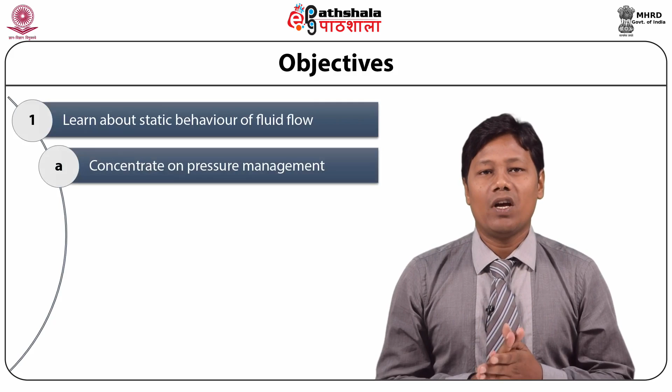Seeing the importance of fluid flow in this subject, we are going to discuss fluid flow and their behaviors in this module. We will learn about the static behavior of fluid flow, mainly concentrating on pressure measurement and how to calculate pressure using different manometers. We will discuss that first, and also do some numericals on that.

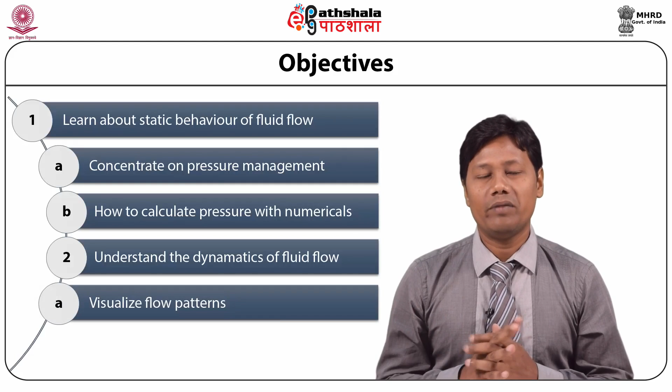Then we will go to the kinematics of fluid flow, where we will visualize the flow patterns and flow types. We will discuss the different flow types so that you can utilize them in our different calculations.

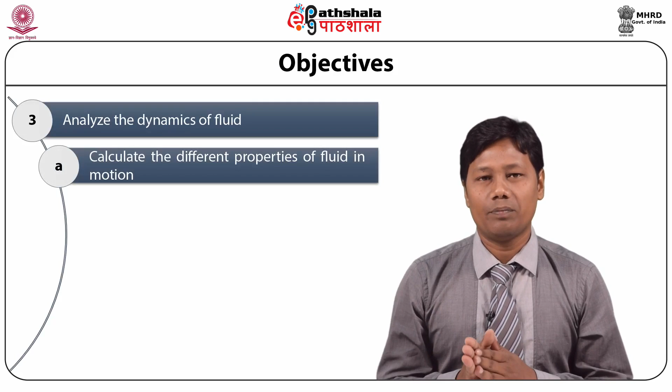Then we will move forward to the dynamics of the fluid. Dynamics of the fluid means when the fluid is in motion, so we will calculate different properties of the fluid in motion. There we will concentrate on the pressure drop in pipe flow, and also discuss different frictional losses in the pipe.

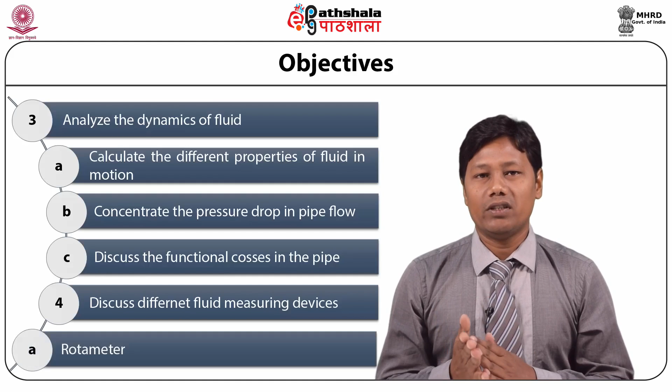Also, we will discuss different fluid measuring devices like rotameter, venturimeter and orifice meters, and the principle of all the equipment.

Let us discuss the importance of fluid flow in food processing. If you go to any food processing plant, you will observe that most of the foods are in liquid form, say for example liquid milk products. So in handling those products, we have to have a thorough knowledge about the properties of the fluid and its flow behavior.

That's why this module is very important, so that different behaviors are well understood by you. Study of fluid behavior is very important. After knowing the behavior of the fluid, you will be able to understand how to handle those liquids, which is important because you are storing the liquid in one container or vessel and transporting it to other places in the plant.

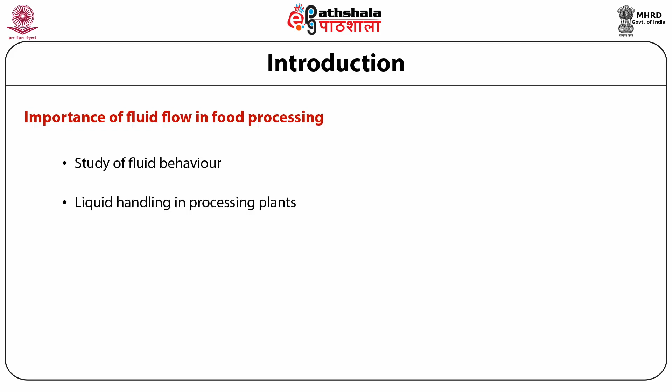So liquid handling is a very important aspect in liquid product processing plants. For handling of liquids, that means transportation of liquid from one place to another, you require some pipelines and some pumps. Depending on the behavior of the liquid or fluid, we have to select a proper size of pump so that it will lift the liquid from one place to another.

At the same time, you have to design the pipeline in such a way that there won't be any obstruction during the transportation of fluids. Also, you need to take care about the hygiene of the pipeline, because if you have some dead ends, some foulings may occur. So these kinds of things you need to take care of when designing the pipeline.

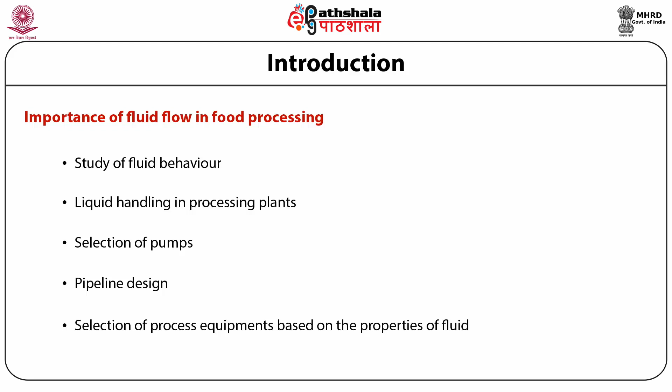This is possible only when you have a thorough knowledge about the behavior of the fluid, whether it is in motion or static position. Lastly, according to the fluid behavior, you should be able to select the process equipment. For example, suppose you are using a plate heat exchanger for heating milk, you have a specific design for that equipment. The same heat exchanger cannot be utilized for heating a chocolate mix. So these kinds of equipment selections you will only be able to decide when you have knowledge of the fluid behavior and fluid properties.

Students, let us learn about the science of fluid flow. The engineering science that deals with the flow of fluid is called fluid mechanics. Fluid mechanics involves the study of different properties of fluids like specific gravity, density, viscosity, etc. Also, it deals with the different forces involved in the mass and energy transfer of the fluid.

Also, we will study here in fluid mechanics the different patterns and types of fluid flow, like streamline flow and timeline, which we will discuss in detail in subsequent slides. Also different types of fluids like uniform flow, non-uniform flow, steady state flow, unsteady state flow, one dimensional, two dimensional, and three dimensional flows. All this we will study in the subsequent slides.

Let us talk about the different branches or categories of fluid mechanics. Broadly, they are categorized into three things. The first one is fluid statics, which is the study of the fluid when it is at rest.

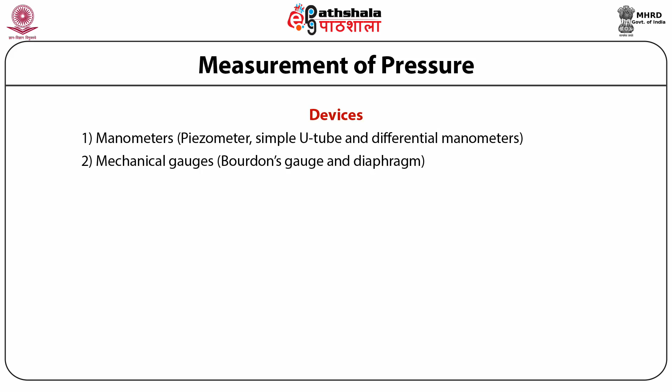Manometers are devices that measure the pressure of fluid at a point, which is equal to the weight of standing fluid above it, that is, P equals gamma into H. So the pressure measuring devices using this principle are called manometers. The top end of the manometer is open to atmosphere, and the pressure in the fluid body is measured in terms of rise in height of fluid inside the tube.

U-tube manometers use a different fluid as manometric fluid. Normally, mercury is used as the manometric fluid. Why is that so? Because its density is too high, almost 13,600 kg per meter cube, so huge pressure can be measured with a small displacement of manometric height.

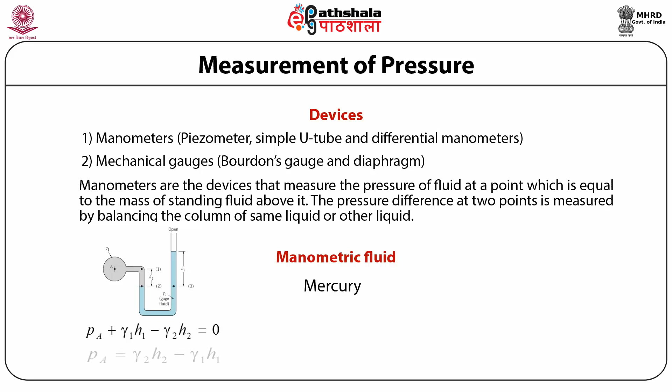See the left side of the picture. Pressure at point A needs to be measured. So take a reference line at 2, 3. The liquid column above the left limb must be balanced with the liquid above the right limb. So, PA plus gamma 1 H1 minus gamma 2 H2 should be equal to 0. Or on the other hand, I can say PA is equal to gamma 2 H2 minus gamma 1 H1.

The right hand side picture is a differential manometer. Here, the pressure difference between the two points is measured, that is, at point A and point B. The pressure expression in this picture will be like this. Take a reference line as we did in the previous one.

In the left limb, your pressure and the right limb pressure must be same. So PA plus gamma1 H1 minus gamma2 H2 minus gamma3 H3 is equal to PB. If we take PB into the left side, it will be PA minus PB is equal to gamma2 H2 plus gamma3 H3 minus gamma1 H1. That PA minus PB is nothing but the pressure difference at the two points. The expression of pressure balance in this picture will be like this as we studied.

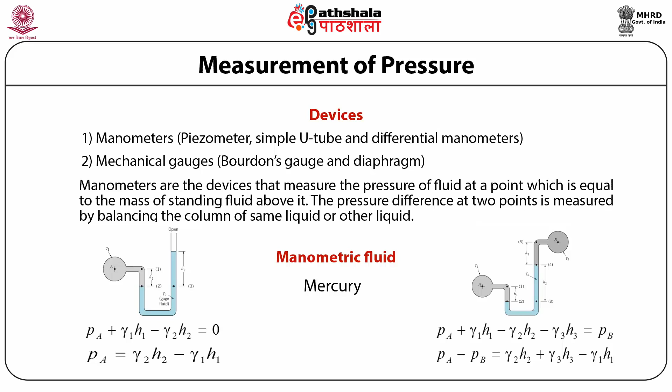Other types of pressure measuring devices are Bourdon's tube and diaphragm. They are spring loaded generally. The pressure energy of liquid is converted to mechanical energy in the spring, and the pointer attached to it is deflected.

Pressure is measured with a standard reference line. Based on the reference line, the pressure is either absolute, gauge, or vacuum. If the pressure is measured from absolute vacuum as datum line, the pressure is called absolute pressure. The violet color arrows indicate absolute pressure in this picture. Bourdon tube pressure gauge measures absolute pressure. Atmospheric pressure is equal to 101.325 kilopascal, which is also called atmospheric pressure.

The pressure measured above this atmospheric pressure datum is called gauge pressure. That means any pressure measured above the atmospheric pressure is called gauge pressure. For example, a Bourdon tube measuring 200 kilopascal absolute pressure is equivalent to 200 minus 101, that is 99 kilopascal gauge pressure.

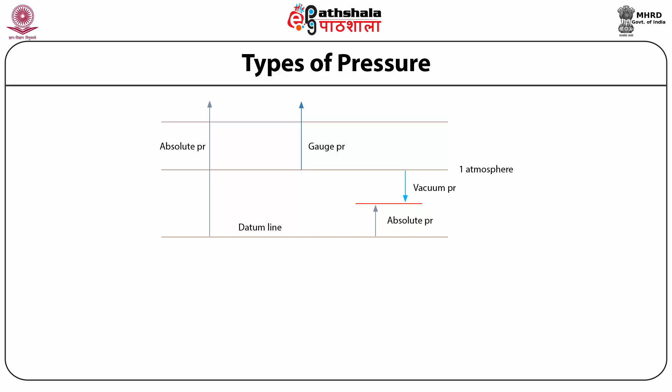So the relation between the absolute, atmospheric, and gauge pressure is developed as P absolute is equal to P atmospheric plus P gauge. That means P gauge is always above the P atmospheric.

In many drying operations, you must have heard about vacuum pressure, where the pressure is maintained in vacuum for efficient and fast drying of food products. The vacuum pressure is the absolute pressure in short of atmospheric pressure. If any pressure falls below the atmospheric pressure, that is 101.325 kilopascal, the shortage is said to be vacuum pressure.

Suppose the absolute pressure is 55 kilopascal. This is less than the atmospheric pressure. The vacuum pressure thus will be 101 minus 55, that is equal to 46 kilopascal. That means we can say 46 kilopascal of vacuum is maintained. The relation is thus P vacuum is equal to P atmospheric minus P absolute.

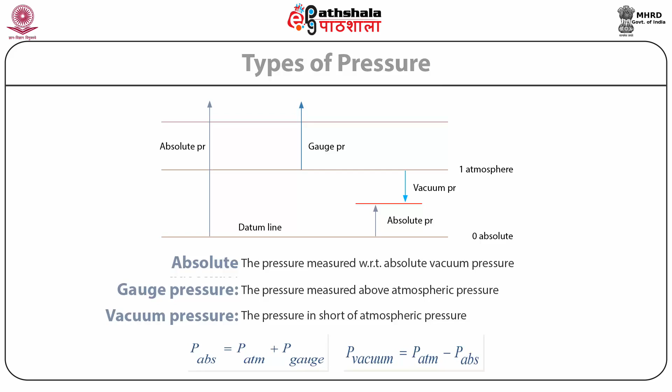Manometers are used to measure both gauge and vacuum pressures. After having a brief introduction on fluid statics, now we will come to fluid kinematics, which is a very vital component of fluid mechanics because you have to visualize the flow in this case.

Fluid kinematics is a branch of fluid mechanics which describes the fluid motion and its consequences without considering the causes of fluid motion. Here, we shall study about the fluid velocity in a fluid field. The fluid flow patterns and types of flow are the two important aspects to be discussed.

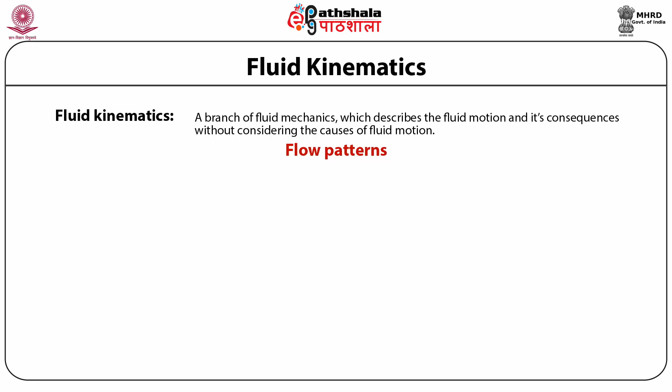Pattern means orientation of fluid particles in both time and space. It is completely a visual subject. The common fluid patterns are streamline, pathline, streak line, and timeline.

Streamline is an imaginary line drawn in such a way that the tangent to this line at any point represents the local velocity at that point. I repeat, the streamline is an imaginary line drawn in such a way that the tangent to this line at any point represents the local velocity at that point. You can see this in the picture on the left side.

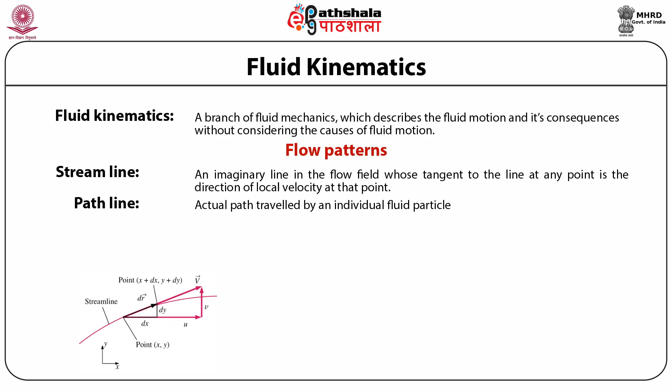It represents the contour of velocity field at an instant. The path line is the actual path traveled by a fluid particle at different instances. You can see it in the middle that the path line is drawn. That means this is the actual path traveled by a particular fluid particle at different instances.

Streak line is the line joined by particles which have traveled through a common point or locus. When a set of points form a line at different instants, it is called timeline. Streamline and timeline give the flow pattern at an instant, whereas streak line and path line represent the pattern with a time duration associated with them. I hope you can differentiate between streamline, streak line, path line, and timeline.

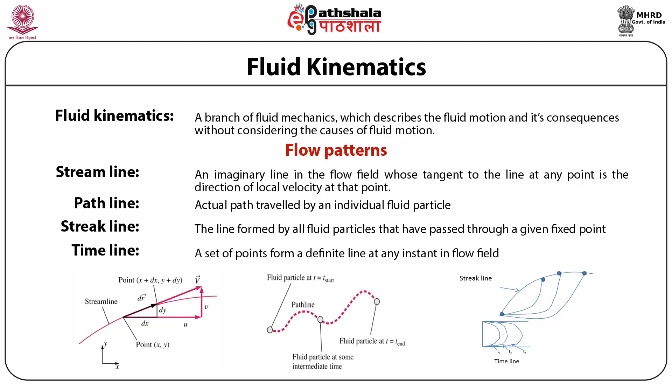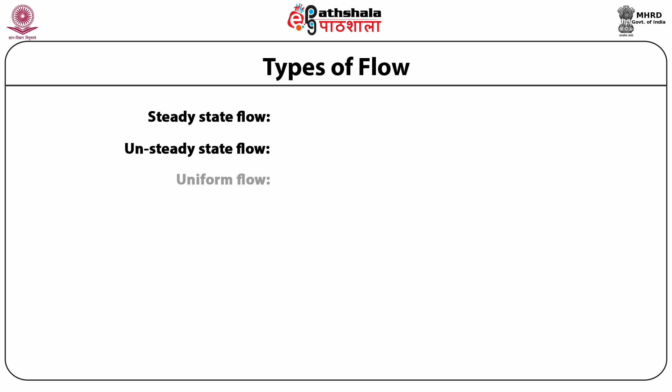Now we'll discuss about the different types of flow. Among the types of flows, these are steady state flow, unsteady state flow, uniform flow, non-uniform flow, compressible flow, laminar flow, turbulent flow, transient flow, one, two and three dimensional flows, rotational flows, and irrotational flows.

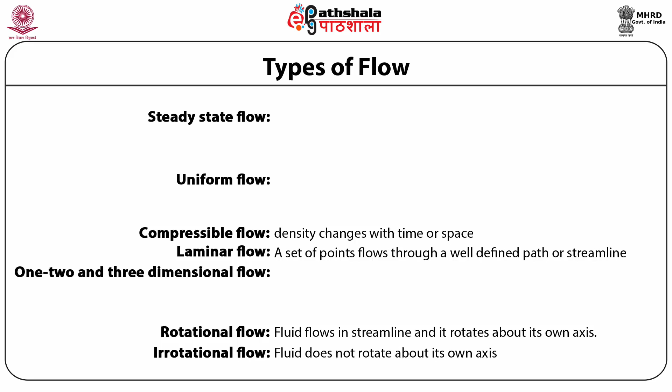In this section, I will discuss steady state flow and so on. Steady state flow is the type of flow where the fluid properties at any point do not change with time. That means the partial derivative of the fluid property with respect to time is equal to 0. Here we have shown del V by del T with respect to space xyz is equal to 0. Or also you can write del rho by del T with respect to xyz is equal to 0, where V and rho are the fluid properties. So the properties of the fluid with respect to time at any point does not change. This is called steady state flow.

Unsteady state flow is the reverse of steady state. That is, the fluid properties like V, velocity, and density change with time at any point. That is, del V by del T with respect to space is not equal to 0, and del rho by del T with respect to space is not equal to 0.

Now come to uniform flow. At a particular space, it does not change with time. Uniform flow is the type of flow in which the velocity and other flow parameters at any instant of time do not change with respect to space. That means the magnitude and direction of the velocity vector are constant in uniform flow. That is represented as del V by del S with respect to time is equal to 0, where S is the space here.

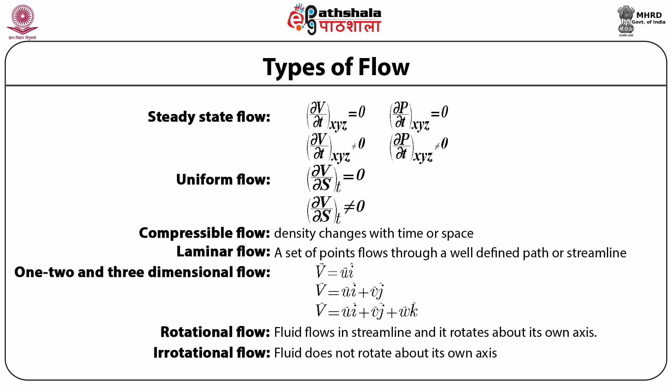Let us discuss Reynolds number. A fluid mass moves from one place to another due to the forces of momentum. At the same time, one resisting force acts against the flow, which is due to the viscous force of the fluid. So changes in the flow characteristics occur if the inertial force surpasses the viscous force. From this understanding, one unitless number has been derived by Dr. Reynold. Reynolds number is the ratio of inertial force to viscous force.

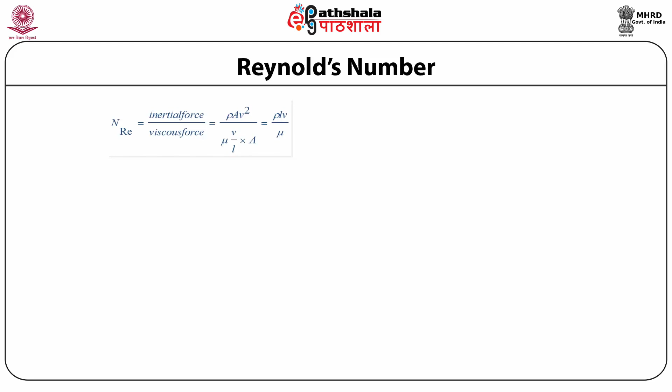Inertial force is dependent on the density of the fluid, fluid velocity, and dimension of the pipe through which it flows. The inertial force is represented as rho A V square. The viscous force, that is the shear stress, is a product of viscosity and velocity gradient. The gradient is dv by dy per unit area. So the expression of Reynolds number will be rho L V divided by mu. In the case of pipe flow, the characteristic length is replaced by the diameter, so it is represented as rho D V by mu.

Reynolds number can also be expressed in terms of mass flow rate. Mass flow rate is discharge multiplied by density. Hence, Reynolds number is equal to 4m divided by pi d mu.

Reynolds number helps in quantitatively describing the flow characteristics of fluid in a pipe. When the viscous force is high compared to inertial force, the flow will be laminar.

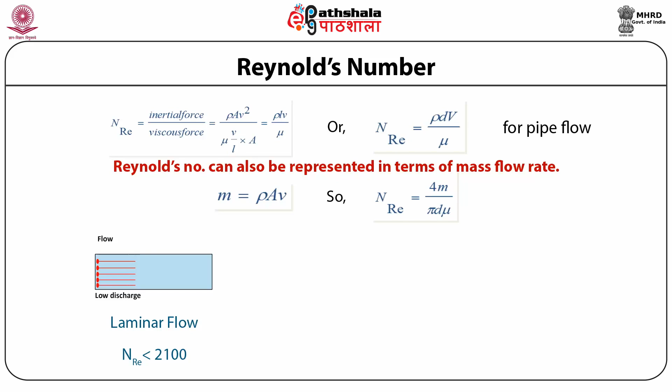The flow is said to be in a laminar region as long as the Reynolds number is below 2100. Since viscous force predominates, the flow is otherwise called viscous flow. That means laminar flow is also called viscous flow.

The Reynolds number between 2100 to 4000 signifies transitional flow. Reynolds number greater than 4000 indicates little influence of viscous force on the flow characteristics. This is called turbulent flow.

Laminar flow is always in a streamline pattern, since the fluid layers are not disturbed by the drag force and the velocity profile remains the same in a layer, which is not happening in the turbulent region.

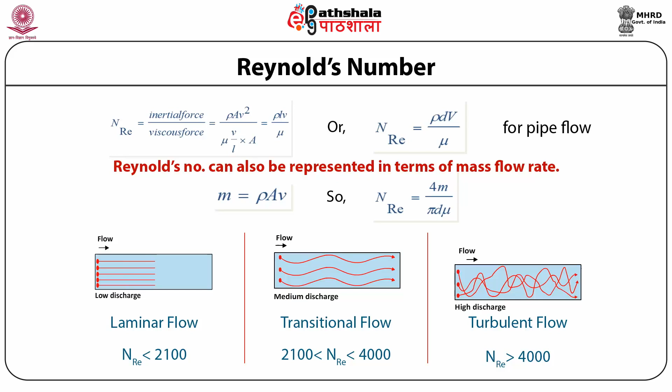Let us take an observation of day-to-day life. You must have noticed your grandpa watering the garden through a pipe. If you squeeze the end of the pipe, the water is sprayed with high velocity. That is what your grandpa used to do when he wished to water the farther distant trees.

So what happens here? The kinetic energy increases and the water is spread to a further distance. This can be proved with the principle of conservation of mass, which is very common in fluid mechanics, and we can derive this equation, popularly known as the equation of continuity.

As per the law of mass conservation, the mass entering a system must be equal to the mass leaving the system, with an assumption that there is no accumulation or loss.

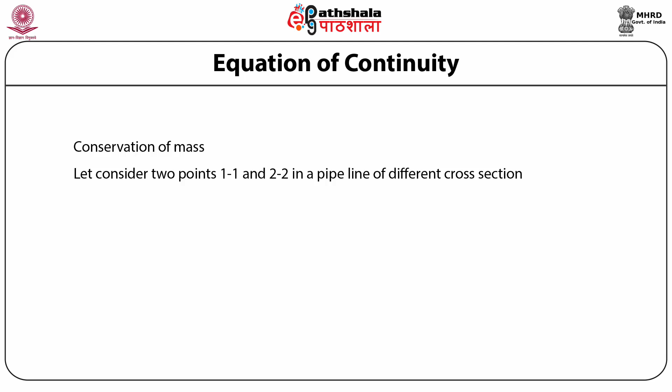The mass flow rate is the product of density, cross-sectional area and velocity. According to the conservation law, the mass flow into the pipe through the left side must be equal to the mass coming out from the pipe from the right hand side. That means M1 must be equal to M2.

And what is that M1? M1 is nothing but rho1 A1 V1, and M2 is nothing but rho2 A2 V2. So rho1 A1 V1 must be equal to rho2 A2 V2 according to the conservation law.

Let us assume that the fluid flowing through the pipe is incompressible. When it becomes incompressible, the density does not change. So rho1 must be equal to rho2, and you can eliminate rho1 and rho2 from this equation. So it now becomes A1 V1 equal to A2 V2.

Or you can say that V is inversely proportional to A. That means when the area increases, velocity decreases, and when the area decreases, velocity increases. That's what you observed when your grandpa was watering the plants.

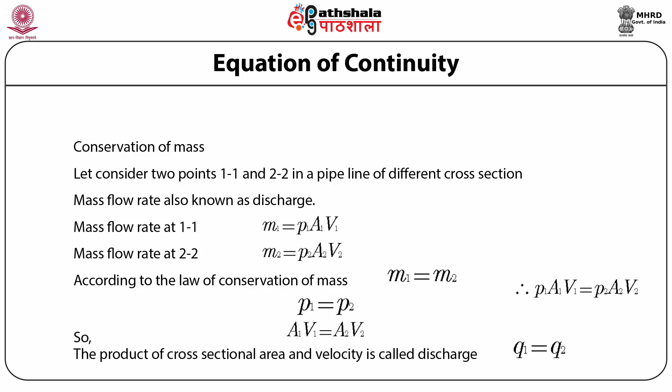The product of area and velocity develops a new term called discharge, whose unit is meter cube per second. That means A1 V1 is nothing but Q, the discharge in meter cube per second. So Q1 is equal to Q2. Discharge in is equal to discharge out, that is, mass flow in is equal to mass flow out. I hope it is clear to you.

Now come to fluid dynamics, the third category of fluid mechanics. Fluid dynamics deals with the study of flow and the energy involved in causing the flow.

The principle of conservation of energy states that energy is neither created nor destroyed, and the total energy within a system remains the same. That means different kinds of energies, mostly potential energy, kinetic energy and pressure energy, the major three energies at any point remain constant in a system.

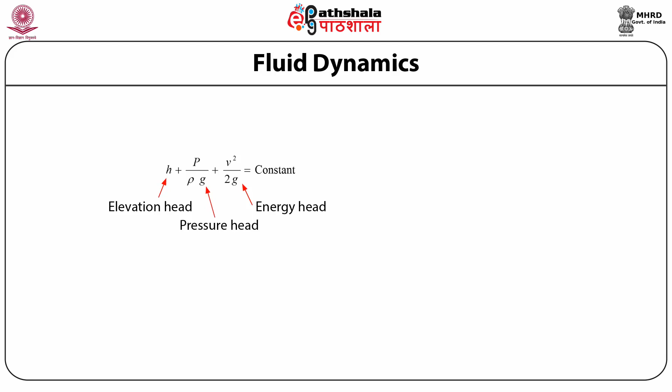Bernoulli's equation, which is a consequence of conservation of energy, is applied to an ideal fluid mass in a flow field.

Bernoulli's equation states that the sum of pressure energy, potential energy and kinetic energy remains same at all points along a streamline.

To derive this equation, we need to assume that the fluid is ideal, meaning viscosity is zero. The fluid must be incompressible in nature. A streamlined flow pattern has to be there with a steady state flow, and the flow should be in a laminar region.

With these assumptions, now we will proceed. If we consider a column of fluid of height h, the total force applied will be rho AGH. The pressure, capital F by A, can be represented in terms of the head small h, which is equal to P by rho G.

Kinetic energy is always associated with the movement of fluid mass, so the kinetic energy can be best described by the velocity of fluid. The energy head is thus represented as V square by 2G.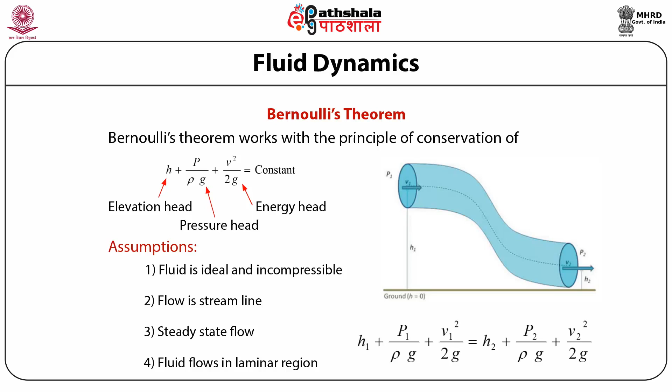The application of Bernoulli's equation is enormous, particularly in fluid flow in food processing. It is very much helpful in pipeline design and selection of pumps. Also, it is very helpful in designing or describing the principle of fluid flow devices.

With the understanding of Bernoulli's theorem, now let us solve a numerical based on this theorem.

Milk is flowing at a rate of 1500 liters per hour through a pipe of diameter 10 cm at a pressure of 80 kilopascal. The pipe is reduced to 7 cm diameter at the other end. Neglecting frictional losses in the pipe, find out the pressure built up at the end of the pipe. Assume milk density as 1030 kg per meter cube.

So to solve this, now first we will draw a diagram.

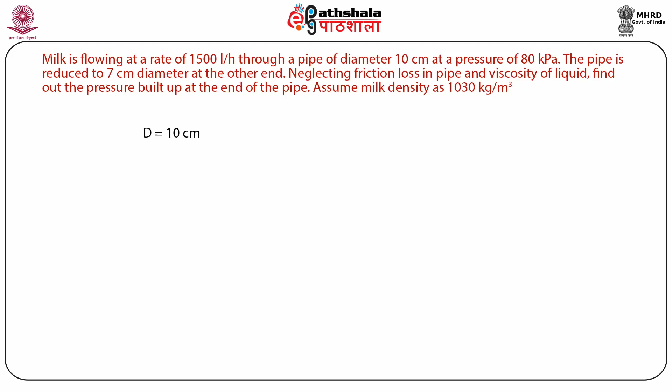On the left side, the diameter is 10 cm, and on the right side, the diameter of the pipe is 7 cm. The pressure at the left side is 80 kilopascal, and the discharge is 1500 liters per hour. It is asked that when the pipe is reduced to 7 cm diameter on the right side, what should be our pressure?

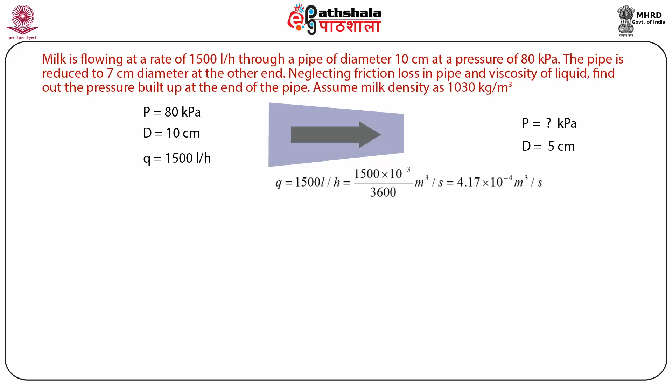Let us first convert this liter per hour into meter cube per second, that is SI unit. So 1500 liter per hour is equal to 1500 into 10 to the minus 3 divided by 3600 meter cube per second, which is equal to 4.17 into 10 to the minus 4 meter cube per second.

Given the diameter, first you need to calculate the area. So the area on the left hand side, A1, is equal to pi by 4 d square, that is pi by 4 into 0.1 square, which is equal to 7.85 into 10 to the minus 3 meter square. Likewise, you can calculate A2 as pi by 4 into 0.05 square, which is equal to 2.5 into 10 to the minus 3 meter square.

You have the discharge at the left hand side, you have the area at the left hand side, so you can calculate the velocity at the left hand side. This can be calculated as V1 equal to 4.17 into 10 to the minus 4 meter cube per second divided by 7.85 into 10 to the minus 3 meter square, so that becomes 0.053 meter per second. That is the velocity at the left hand side, that is the velocity at the bigger diameter pipe section.

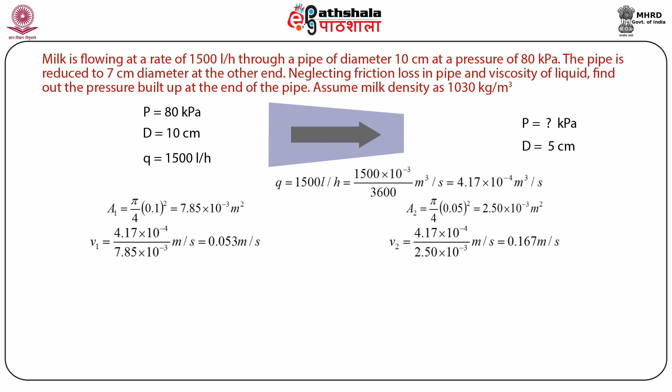The same way you can calculate V2 at the right hand side. The V2 becomes 0.167 meter per second. Now apply Bernoulli's equation.

Bernoulli's equation says that all the heads, that is the pressure head, kinetic head and elevation head, the summation of all these three at any point will be same. So it will be Z1 plus P1 by rho g plus V1 square by 2g is equal to Z2 plus P2 by rho g plus V2 square by 2g.

Assuming that there is no elevation of the pipe, we can neglect Z1 and Z2. So our final equation will be P1 by rho g plus V1 square by 2g is equal to P2 by rho g plus V2 square by 2g.

We can rewrite this in this form: P2 equal to P1 plus rho by 2 into V1 square minus V2 square. Now putting the values of rho and V1, V2 in this equation and P1 of the left side diagram, you can calculate P2 equal to 80 plus 1030 divided by 2 into 0.053 to the power 2 minus 0.167 to the power 2.

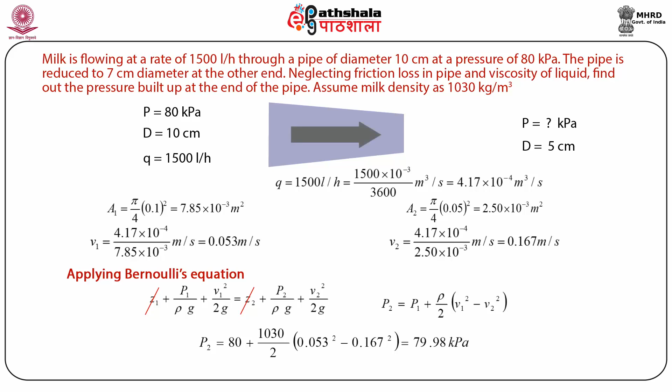Then we will get the pressure P2 is equal to 79.98 kilopascal. So what we observed here in this numerical is, initially your pressure was 80 kilopascal at the left hand side. When you reduce the diameter to 5 centimeter, your pressure was reduced. The loss of pressure head is compensated by the increase in kinetic energy.

So what is importance in this slide? Let me tell you. Because there are some losses, the energy which we are inputting in terms of the mechanical energy is not getting transmitted to the fluid. In this, we will discuss about different losses due to friction.

One of the major losses in the pipe flow is due to the viscosity of the fluid. That means, the more viscous the product or liquid is, the more resistance it offers. So if we are handling a viscous fluid like chocolate mix, we need to select a higher HP motor for transporting the chocolate mix from one place to other place. Whereas if you are handling water, then you may not require that amount of horsepower in transporting the water to the same distance. So fluid viscosity is one of the major losses.

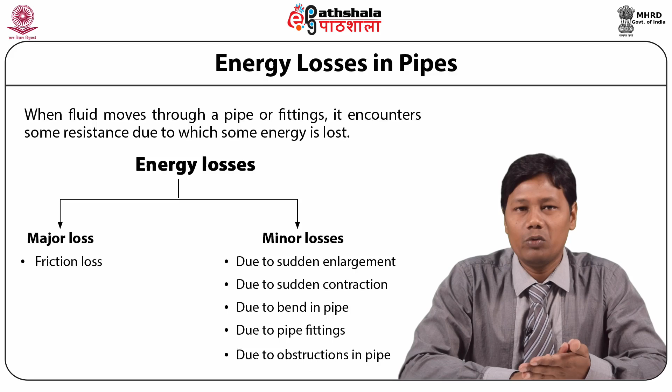In the previous slide we discussed, I gave a general overview of the different kinds of losses. One of the major losses is your frictional losses. Let us discuss about the loss due to pipe friction, which is a very major loss in the pipe flow. Assuming horizontal pipe and a constant velocity flow, we can write the Bernoulli's theorem.

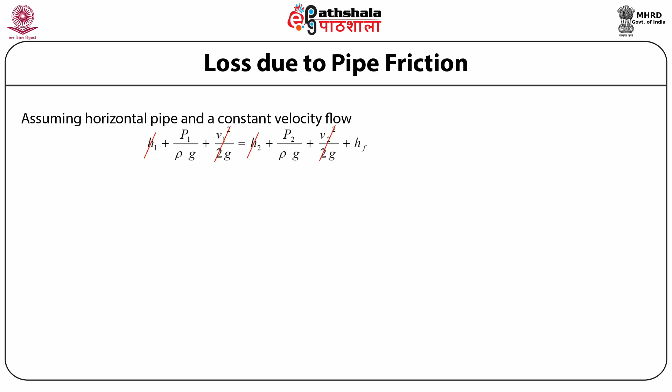We can write the Bernoulli's equation in this way: H1 plus P1 by rho g plus V1 square by 2g is equal to H2 plus P2 by rho g plus V2 square by 2g plus Hf. Here Hf is the loss of head due to pipe friction. Assuming there is no elevation head and no velocity head, we say that the loss of head due to friction Hf is equal to P1 minus P2 by rho g.

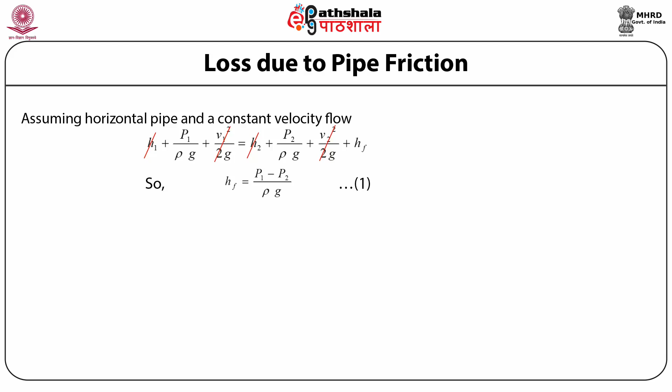Darcy-Weisbach developed an equation considering the relationship of loss to the dimensions of the pipe. The dimensions are the length of pipe and the wetted perimeter of pipe. In calculation, hydraulic diameter was used, which is equal to 4 times area to wetted perimeter. They developed a proportionality constant called friction factor, denoted as small f, which is equal to the drag force per unit area divided by the density and kinetic energy.

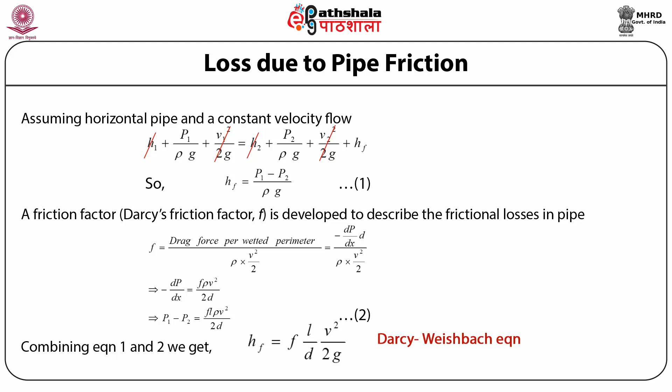The drag force minus dp by dx is now equal to f rho v square by 2d, or you can write P1 minus P2 is equal to Fl rho v square by 2d. So combining equation 1 and 2, we obtain Hf is equal to F into L by D into V square by 2g. This equation is popularly known as the Darcy-Weisbach equation of friction loss through pipe.

Let us discuss about the Fanning's friction factor and Moody's diagram.

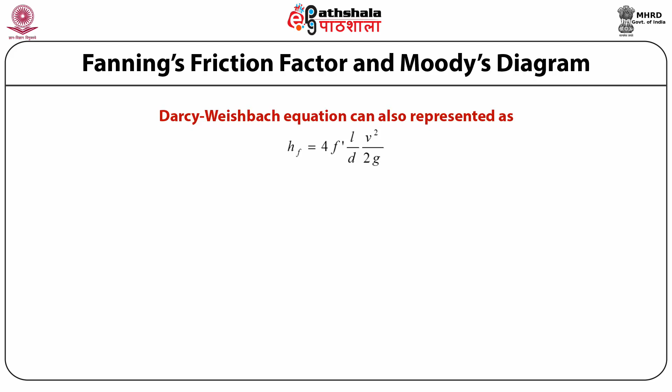Darcy-Weisbach equation can also be represented as Hf equal to 4f' L by D into V square by 2g, where f' is called coefficient of friction or Fanning's friction factor. D here is the diameter of pipe, which was hydraulic diameter in the previous equation.

Fanning's friction factor is a function of Reynolds number and the relative roughness of pipe. In the laminar region, that is Reynolds number less than 2100, the relation is f' equal to 16 by Reynolds number. For Reynolds number varying from 4000 to 10,000, the empirical relation developed is f' equal to 0.079 divided by Reynolds number to the power 0.25.

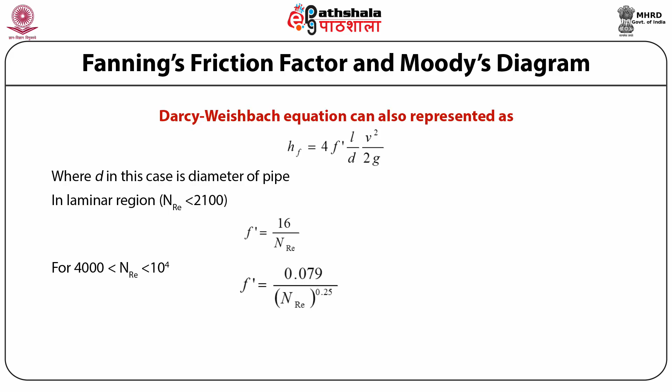In the complete turbulent region, some other relation is also there. The graph showing the relationship of Fanning's friction factor with Reynolds number and relative roughness is called Moody's diagram. That means in calculation we will take the help of this Moody's diagram to calculate the friction factor at different roughness of pipe at a particular velocity of flow, that is in the form of Reynolds number.

The roughness of pipe can also be found from literature for different materials, like roughness is less in stainless steel compared to plastic or wood. After calculating the nature of flow, that is calculating the Reynolds number, Moody's diagram is used to calculate the friction factor for head loss calculation.

I hope you understood the utilization of Moody's diagram. I repeat, Moody's diagram is utilized to calculate the friction factor at different roughness of pipes at different Reynolds number. You can take the help of this empirical relationship after calculating the Reynolds number.

If it is in the laminar region, you take the first case, that is f' equal to 16 by Reynolds number. If it is in the turbulent region, then you can take the help of the second case, that is f' equal to 0.079 divided by Reynolds number to the power 0.25.

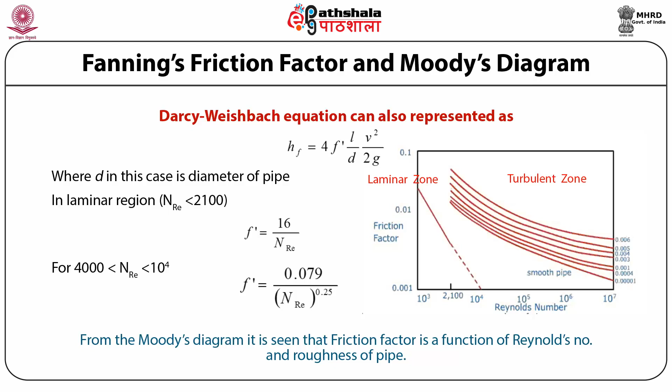After having a discussion on the major loss, that is friction loss in the pipe, let us give some light to the minor losses. Though their loss is not so significant, we need to know what these losses are and how you can calculate them.

The expression of minor losses can also be derived from Bernoulli's equation. If you want, you can refer to any standard books to see the derivation of the minor losses. So we won't go into detail of the derivations here. Let us discuss only the expressions of head losses.

First, take the case of sudden enlargement, the loss due to sudden enlargement. If a pipe is enlarged at a point, the velocity gradient occurs, and head loss is encountered, which is equal to He equal to V1 minus V2 whole to the power square divided by 2G.

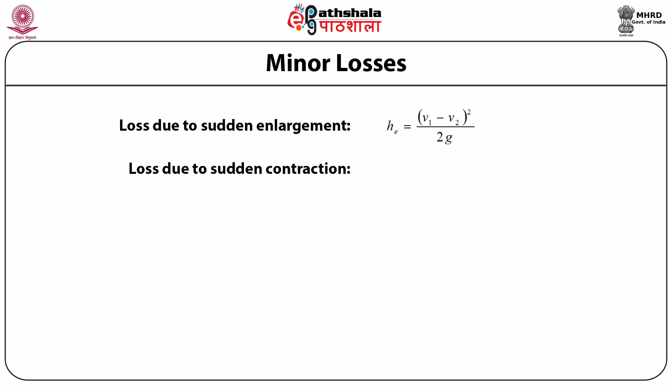Likewise, when the pipe is contracted to a smaller diameter, as in the case of an orifice meter, the loss is expressed as Hc equal to K into V2 square by 2G, where K is expressed as 1 by Cc minus 1 whole to the power 2. Here, Cc is called the coefficient of contraction. The value of K varies from 0.5 to 0.7.

Now, coming to the loss due to bend in pipe. The bend in the pipe cannot be avoided in pipeline design. Since velocity is a vector quantity, the change in flow direction changes the flow velocity, so some loss occurs, which is equal to Hb equal to K V square by 2G, where K is the bending coefficient.

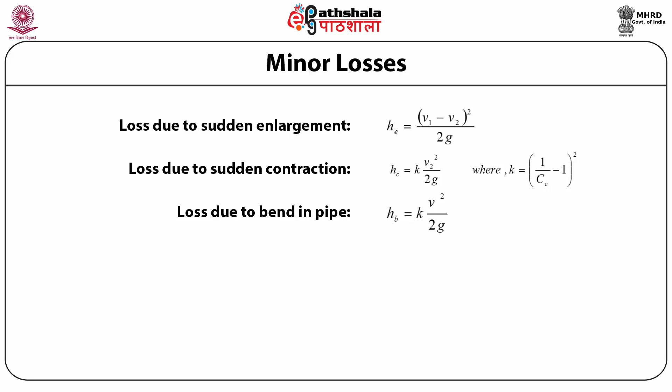The fittings like pressure gauge, thermocouple, etc. in the pipeline disturb the normal flow region. The loss of head in this case is K into V square by 2G, where K is the coefficient of pipe fittings. The flow regime at the entrance and exit are also different from the fully developed regime.

The loss at the entrance of the pipe is equal to Hi equal to 0.5 into V square by 2G. At the same time, the loss at the exit will be Ho equal to V square by 2G.

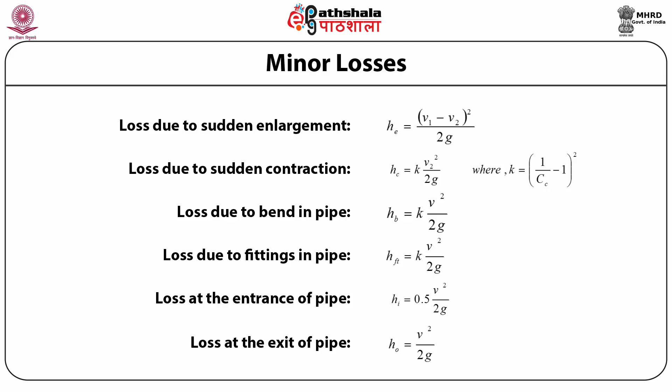So all the losses are summed up to calculate the total head loss in pipe flow, that is the minor losses we discussed here combined with the frictional losses. So considering these losses, we can calculate our required pressure so that we can select a proper pumping system for our pipeline.

Now, let us discuss about some flow measuring devices.

One of the major applications of Bernoulli's equation is the design of flow measuring devices. These devices are used to measure the flow rate of fluid. The common devices used to measure the flow rate, or discharge, are venturimeter, orifice meter, pitot tube and rotameter.

Venturimeter consists of a converging section, a throat section and a diverging section. A U-tube manometer is attached at 2 points, one limb before the entrance and the other at the throat. When fluid flows, the area becomes constricted, thus velocity increases, meaning kinetic energy increases. But as per Bernoulli's theorem, the total energy at all points remains identical. So increase in kinetic energy is compensated by reduction in pressure energy, assuming elevation head as 0.

With this understanding, the pressure energy in terms of manometric head is derived from the main equation. The equation is Q actual equals CD into A1 A2 divided by root of A1 square minus A2 square, into root over 2GH, where CD is called coefficient of discharge, whose value is always less than 1. By multiplying the CD value with the theoretical discharge, we get the actual discharge.

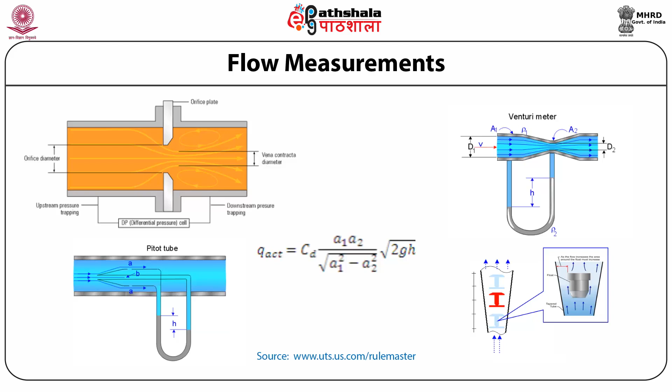Students, let us summarize what we have learned in this module. First, we discussed the different branches of fluid mechanics: fluid statics, fluid kinematics and fluid dynamics, in detail. In fluid statics, we calculated different pressures using manometers. I hope you will be able to do any kind of numericals related to pressure calculation.

Also, we studied the visualization of flow patterns and different types of flows. In dynamics, we studied Bernoulli's theorem.

We applied Bernoulli's theorem and calculated different pressure drops. We studied how to do that, and calculated different frictional losses in pipe flow. There are different cases, which we discussed in detail. I hope you will be able to calculate any kind of frictional losses through pipe flow.

And lastly, we applied Bernoulli's theorem and studied the principle of measuring devices like rotameter, venturimeter, orifice meter, and their utilization in food processing plants. Thank you very much and have a good time.